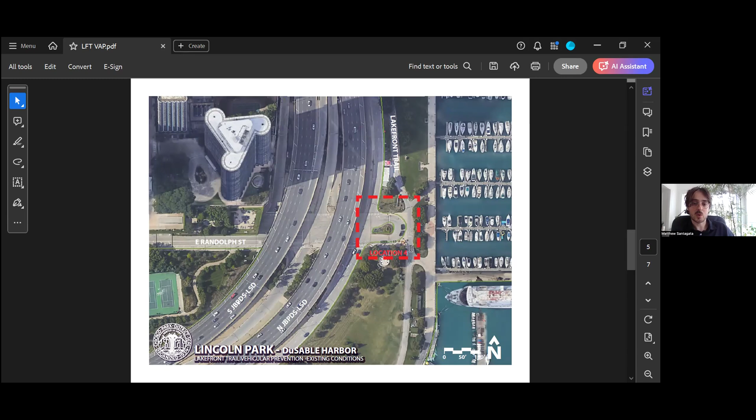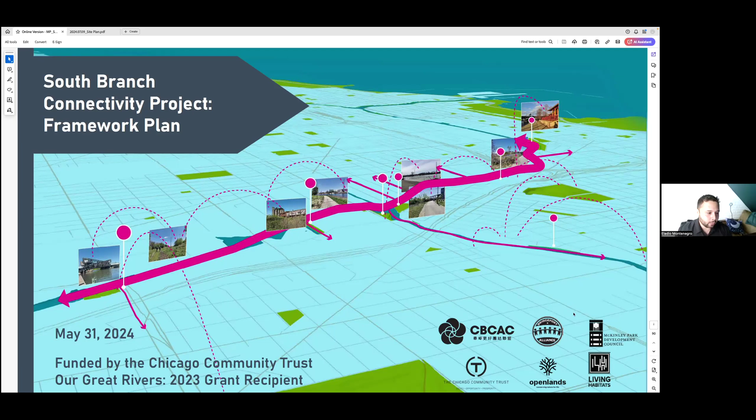So again, the goal of the framework plan is to create a framework plan connecting the lakefront from Western Avenue to Ping Tom Park. This serves as a guide for future plans or work on how to connect these separate parts of the river.

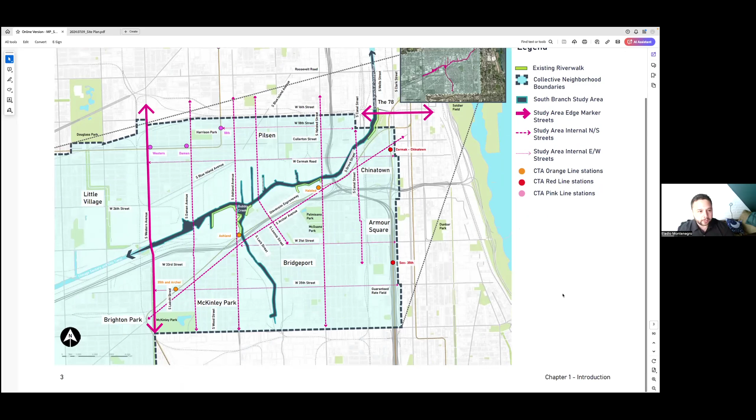There are currently a few parks scattered throughout, and in the following sections I'll talk about some of the work we did. But this all builds on two decades of previous planning done by other community groups and by the city.

Our objectives: provide a continuous trail from Western to Ping Tom Park, improve mobility, safety, and accessibility for pedestrians and cyclists, and connect the adjacent neighborhoods—Bridgeport, Chinatown, McKinley Park, Little Village, Brighton Park—all disconnected by the river, railroad tracks, and big streets. This trail will help connect all these neighborhoods.

Also, to create a cohesive sense of place along the South Branch. On the north side, downtown, the riverfront is an asset for them—it's a place to go, somewhere cool. For us on the south side, it's like factories and contaminated land. So the idea is to make it an asset for the neighborhood.

And then expand and improve active public spaces along the South Branch, encourage improvement and environmental cleanup of the properties, and provide equitable access to the riverfront for all of our neighborhoods, for all of our neighbors and residents.

So chapter 2 covers our community engagement. Over the whole year we did several community engagement events—hopefully some of you made it out or heard about them. We had 6 events over 5 months.

We talked to hundreds of people, collected hundreds of surveys, and used all that info to help put this framework plan together, so that we would make suggestions that are what people wanted, what the neighbors wanted, and not just what we thought would be our best practices.

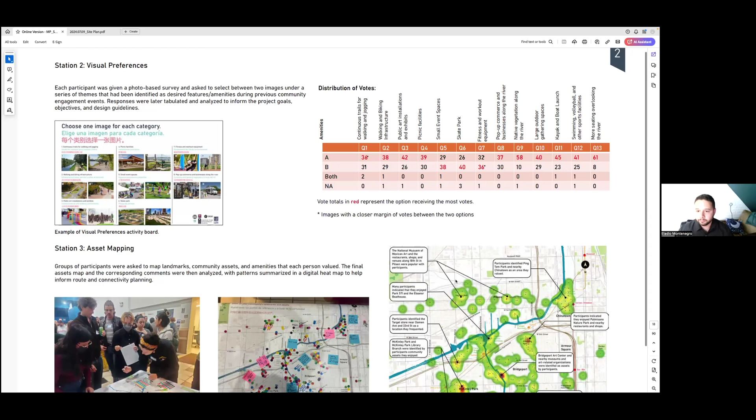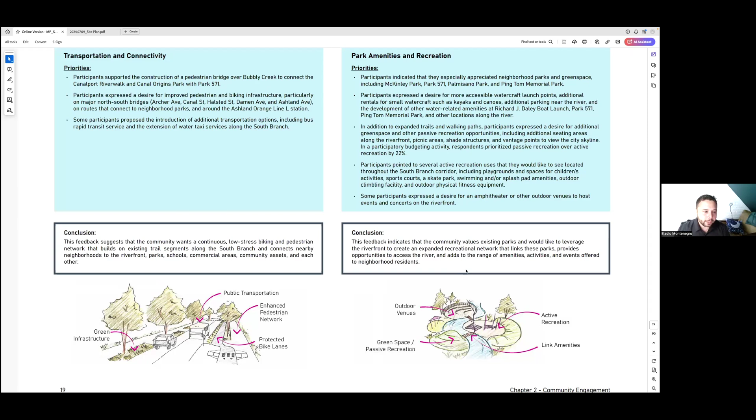They want more park amenities and places to go. We have parks scattered throughout, but the parks on the riverfront aren't very easy to get to. So making them easier to get to and giving people somewhere to go was what we heard a lot.

Folks would also like to build on the branch's history of industry and connect the adjacent neighborhoods. A huge request for art and something nice to look at was what a lot of folks wanted.

A lot of people wanted environmental and sustainable growth. They want these lands to be cleaned up and used for something positive for the neighborhood, not just more warehouses or polluters like asphalt plants or metal recycling plants, which we have a lot of in the neighborhoods now.

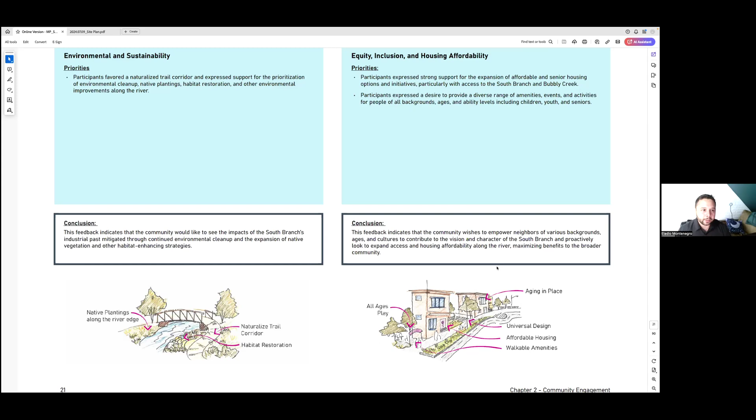And then equitable, inclusive use of the land. A lot of our seniors and older folks are very concerned that this would turn into a 606-type situation, where we make something nice for the neighborhood and then nobody can afford to live here anymore because we all get priced out. Fear of being driven out of the neighborhood was a huge piece of feedback.

And then folks want proper use of the land. They want it to be green space, they want it to be housing, and a mix of all the things, less heavy industry.

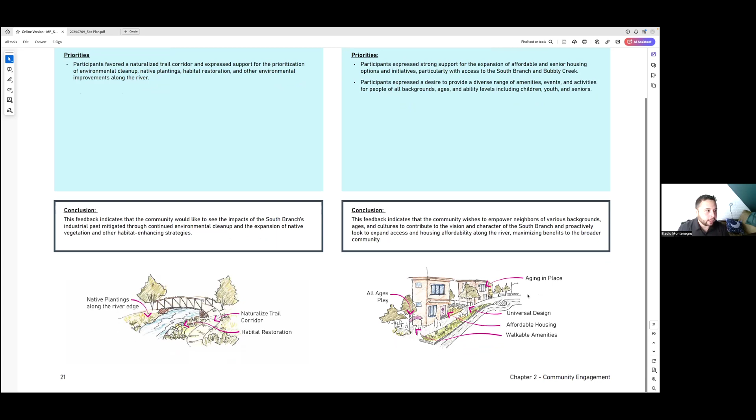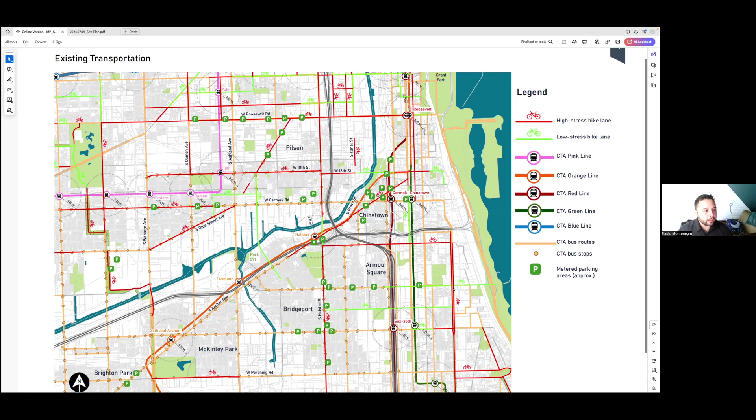Chapter 3 covers our existing conditions, so the properties that we have along the river. Over the year, we took an inventory of all the properties along this about 3-mile stretch. Who owns them? Are they planning to sell? And then what we can do to prep for when they eventually do turn over. So we broke it up into 3 sections: Western to Damen, Damen to Halsted, and then Halsted over to Ping Tom Park.

Through these sections, we have a variety of property owners. Starting at Western Avenue, we have the Daley boat launch, which again, most neighborhood folks didn't know that there's a boat launch on Western Avenue. It's kind of hidden. You have to get across 2, 4, 6, 8 lanes of traffic to get from one side of Western to the other. So only the folks who have boats know that this is somewhere where you can come and drop your boat and get to the lake.

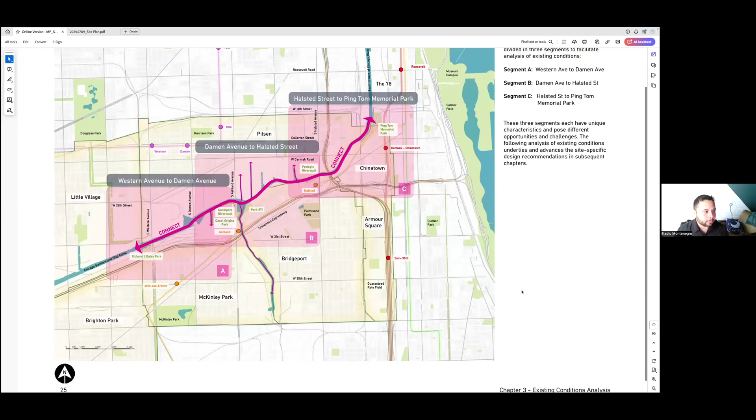So the city has proposed plans to improve the Western Avenue Bridge, and we've been advocating for them to create a crosswalk. As it stands right now, from 26th Street to 35th, there is nowhere to cross. You have almost 10 blocks where you can't get from one end to the other. So it's a huge barrier for folks to get to that boat launch.

Starting on the other side of Western, we have dark pink properties, which are properties that are slated to change ownership. The current city riverfront guidelines require that anyone who buys property on the river and develops it has to build a riverfront trail. So as these properties turn over and they build something, they'll be required to build a trail.

So we know that, if you guys follow the news, the Damen silos will be turning over soon, or they have been sold. They're going to build something, and we're going to get a trail. We would like it to be something nice, but either way, we'll get a trail.

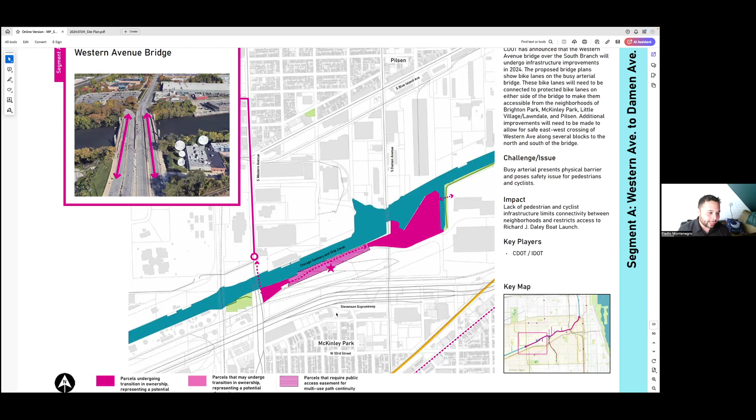But the first one is a telecommunications property called SageNet, currently for sale. We're keeping track of them, hoping that turns into a trail.

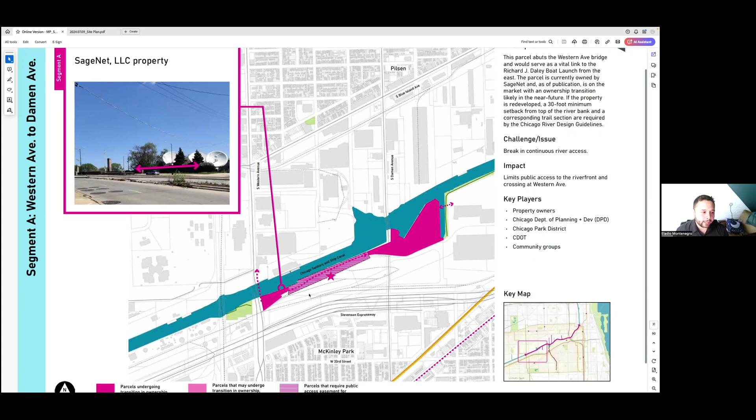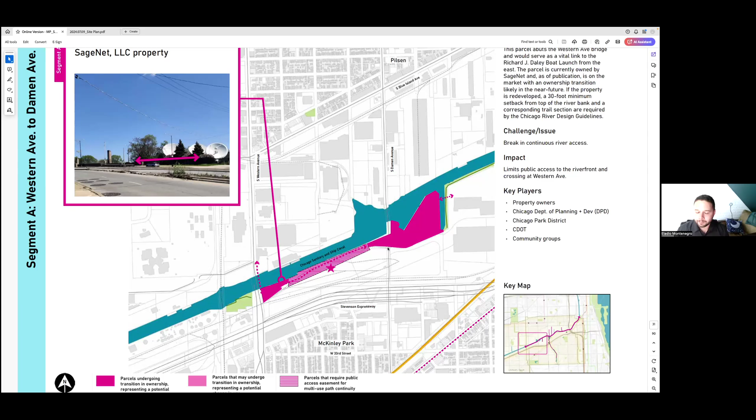And then between them is a huge chunk of land owned by BNSF Railroad. No plans to sell or do anything with it. You guys probably know working with railroads is difficult, but we've been in talks with them to see if they'll let us have an easement to connect these two ends. Slow, but they haven't said no yet, so we're hopeful.

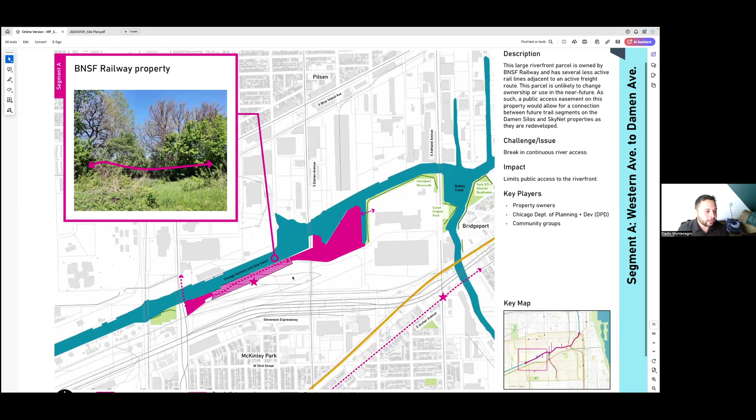They own a huge chunk of land that is just overgrown green, and our plan would be to just cut a path through it to connect these two ends that would connect to the Damen silos. Current plans are to demolish them. We would like them to be kind of like an icon in the neighborhood. But either way, if they get torn down or if they stay, we'll get a trail that would connect you to the current parks, which is Canalport Riverwalk.

And then across the street on Ashland is Canal Origins Park. So we have the potential into the next few years for there to be a connection from current parks from Ashland to Damen, and then hopefully from Damen to Western.

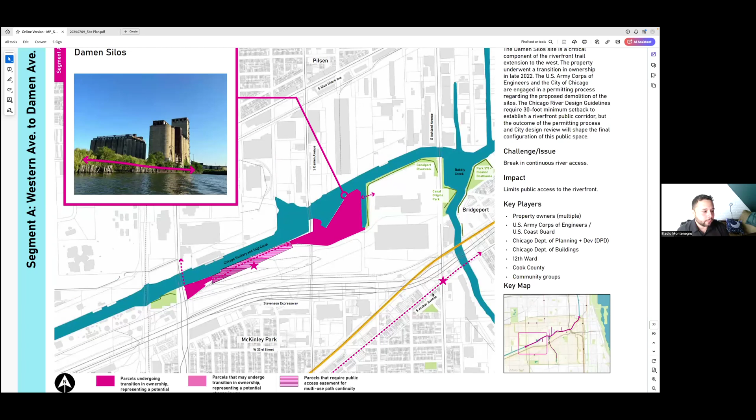And then again, Archer, very, very busy street. Our goal is to get folks off of there.

So our second section is from Damen to Halsted. On Ashland, we currently have several parks: Canal Origins Park and the Park 571 Boathouse. Future goals would be to have a bridge connecting these two parks so folks can get from one end to the other.

We have a train station on Ashland Avenue, one of the busiest on the Orange Line, but very hard to get to. There's a whole community cut off by the expressway and viaducts. A bridge over Bubbly Creek would let them go from the neighborhood to the train station and cut about 20 minutes off their walking commute, and it would help connect these parks into a continuous trail.

Once you get to the other side of the river, we have the Boathouse, which used to be a Peoples Gas lot and Superfund site, meaning extra contaminated. Next to them is a current Peoples Gas property lot we've spoken to them about. They plan to do an environmental cleanup of that property, finishing sometime in 2025. They won't tell us what they'll do with it afterward, but we're assuming if they're cleaning up their property, they're going to sell it or build something on it. At that point, whoever builds something there has to build a trail, which would connect Park 571 to Loomis, a connection to Pilsen. We hope to acquire that property and just make it one big park.

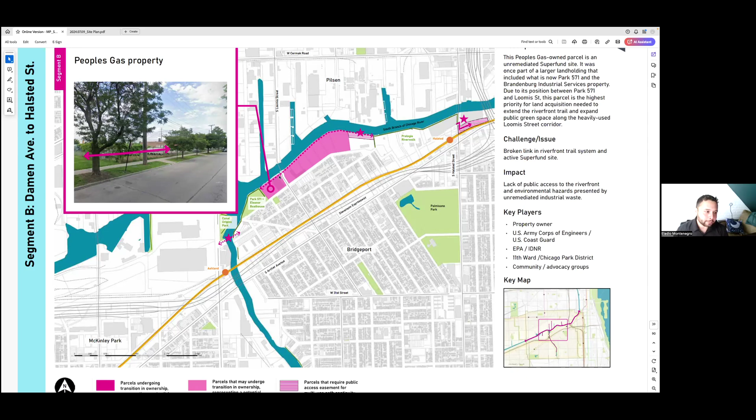On the other side of Loomis is a property called Brandenburg. We talked to them — they may undergo transition. We spoke to their property owners, and they said, yep, we're moving our stuff out to the burbs and plan to sell. So we're just keeping an eye on them to see what happens. That's also a Superfund site, meaning it's extra contaminated, so it would require a good chunk of money to remediate. But once someone builds something there, we get another trail.

Next to them is a ComEd substation. They have about 15 feet already separated from the riverfront, which we're talking to them about for a potential trail. ComEd isn't super friendly or easy to work with, but they haven't said no yet. They asked us for drawings and we provided them, so we're hoping that moves forward.

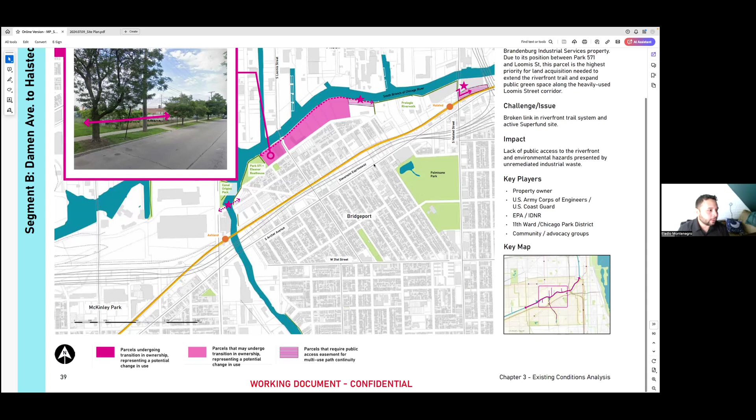Once we get to Halsted — next to the ComEd substation is the only part of the south side that has a riverfront trail built to current river guidelines. A company called Prologis bought the empty lot, built a warehouse, and had to build a trail. It's a really nice trail, which I'll show pictures of later. That drops you off onto Halsted.

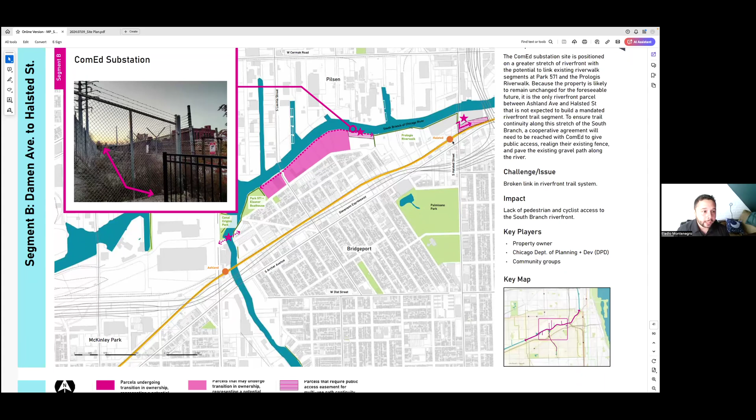The other side of Halsted, from Halsted to Ping Tom Park, is mostly businesses whose warehouses or buildings run right up to the river, meaning there's no space for a riverwalk — just the building, maybe 4 feet for a fire escape, then the river. So for this section, we have to take the street.

Right at Halsted, there's a little knee wall connecting to property owned by Canadian National Railroad. We're in talks with them about maybe an easement that would let us connect to a back street off of Archer, running along the railroad. So we're working through that one.

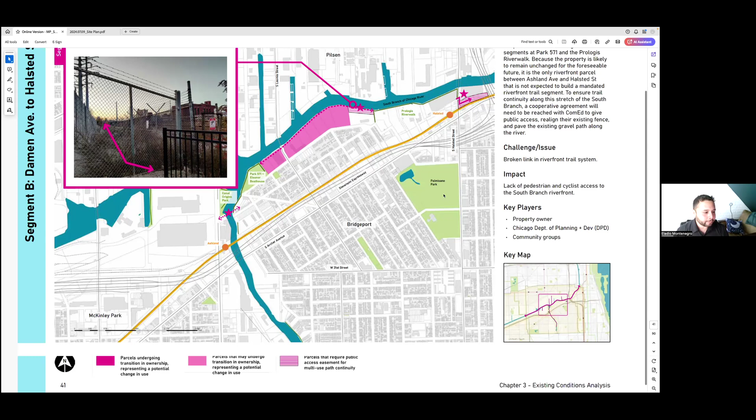After that is just a gravel road for a lot behind Archer, connecting to a building called the Pacifica. That one was recently sold, and they're going to turn it into mixed use like hotel and retail. We're working with them to put a bike lane in front of their building that would connect to the rest of our trail and continue it forward.

After that, we have a city-owned lot right on Cermak and Canal. They said they're going to put that one up for sale. Once someone buys it, we get a trail.

After that, we have Lawrence Fishery. They're not going anywhere, but they already have a dock, and we talked to them and they said whatever you guys want to do, we're happy — whatever brings more traffic to our place, they're happy to cooperate with us.

On the other side we have a yacht yard, and then finally we get to Ping Tom Park, which we think will be our most difficult piece, because at the end of Ping Tom Park there are four different railroads and an actively used bridge. That's one of our biggest challenges — low clearance, an active bridge, and a bunch of railroads running through there.

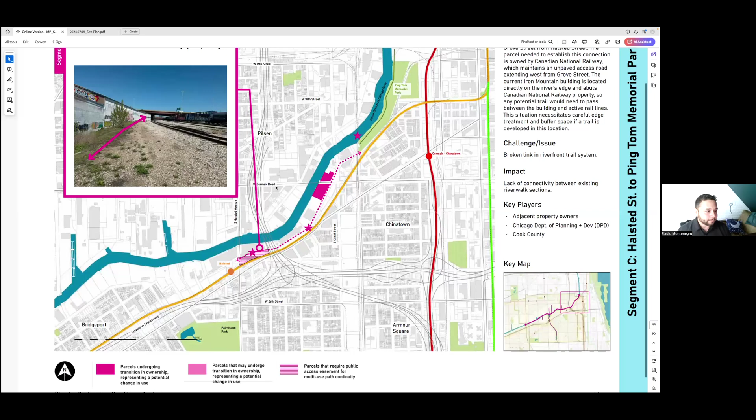So chapter 4 covers our connectivity plan, so what we would like to do is connect everything, right, from Western to Ping Tom Park.

We've listed a few alternatives. If we can't get the railroads to cooperate, or if properties don't sell, then we've outlined different routes that folks can take to go from one place to the other. And we're actively working with our wards to see if we can turn those alternative streets into greenways where folks can bike ride to get from one side to the other.

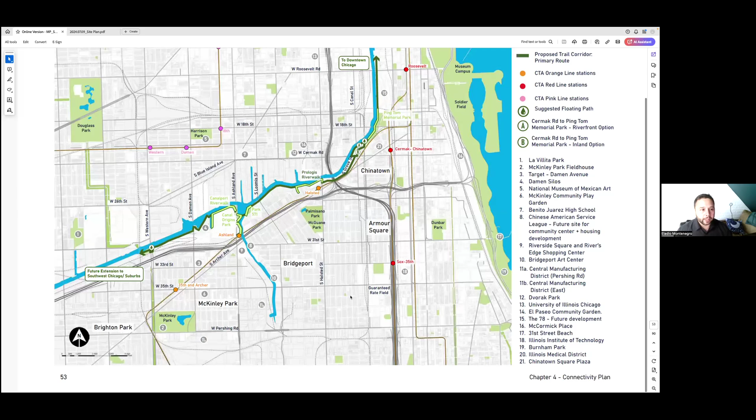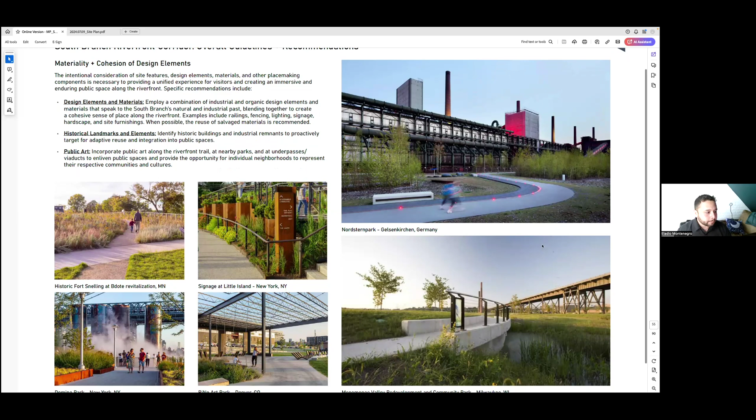But all of our suggestions center around using what we already have. We know that the railroad isn't going anywhere. We know that the I-55 isn't going anywhere. So our suggestions center around using what's there, right? Doing simple, easy to do construction that incorporates the history of the neighborhood, which is an industrial corridor.

One of our big recommendations is making sure our trail entrances are well lit, that signage is up. Wayfinding is a big issue for us on the South Branch. There are several parks, but they're not easy for you to see. You drive down Ashland and see that there's 2 parks on either side on the river. There's no signage for them, so wayfinding is important, and making sure that our entrances are well lit and welcoming.

And a big piece is getting people close to and onto the water. We already have a lot of that in the city, so it's something that we want to do on our end. And then continuing to plant local natural foliage, local trees, and creating habitat for our fish and wildlife.

And then creating public spaces, give people something to go to and something to see, and incorporating, again, our train stations, our viaducts, our bridges, to create inviting, nice places to go to.

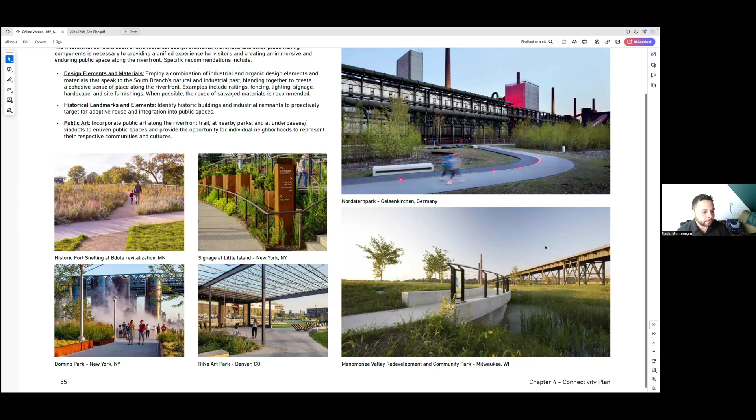And then we cover our recommendations on how we would connect these things, right? So, the boat launch, you got to get across Western. A lot of our recommendations for these big streets are to go under the bridges, like we do downtown, creating bridges under bridges. And so all that requires working with CDOT, with IDOT, Army Corps of Engineers. We've had conversations with all of them, and we're working to move these plans forward.

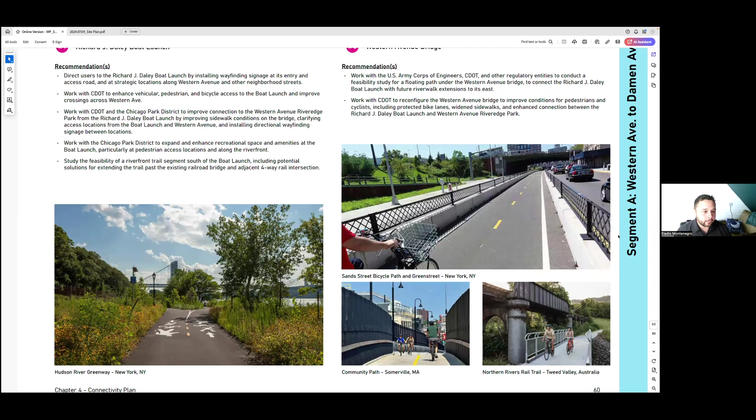And so at our Damen Silo site, we'd like to see a bridge over one of the slips, natural green access for folks to just sit and be by the river. The Damen Silos, Park 571, everything around Ashland has a great view of the downtown area. So our goals are to create a view that could look that way.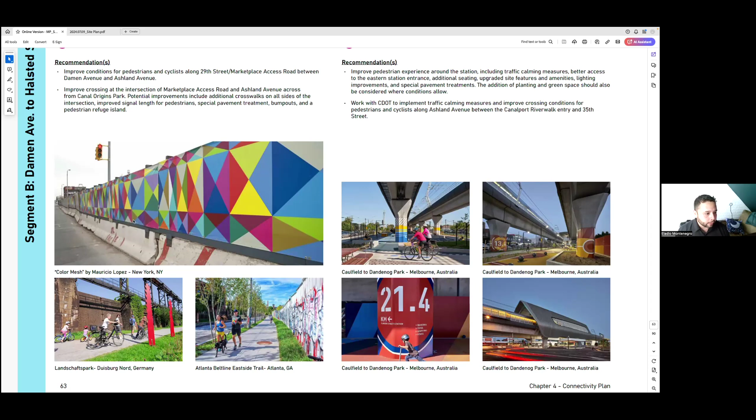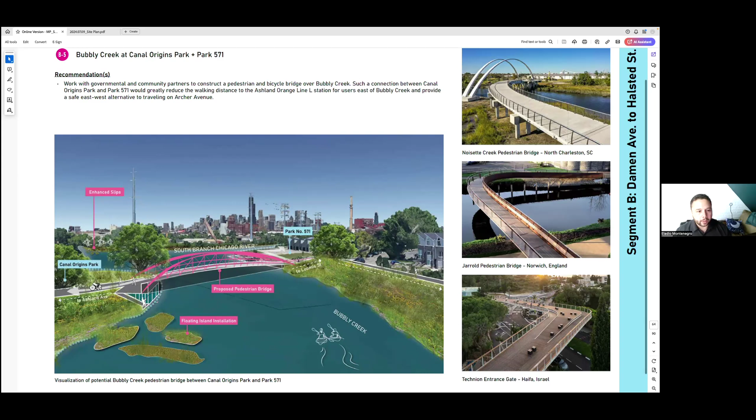And then one of the big things that we would like to see, and that we know folks in the neighborhood like to see, is the bridge connecting Park 571 to Canal Origins across Bubbly Creek. And we already have ideas where those bridges could go and land, and there's examples from here in the States and overseas where it's done. So it's not a huge lift, but it just requires working with the park district, with the city, and with whoever's going to give us a ton of cash to make it happen.

And then again, more recommendations on what we could do to, once we connect properties, right, creating trails, examples from here in the States and abroad of what could happen.

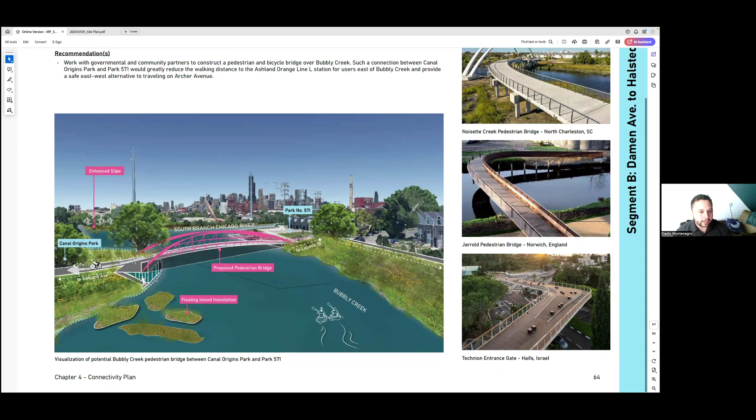And then examples of, at the ComEd substation, they have their heavy duty walls, which of course they need to protect the substation, right? That's serious infrastructure. But we have examples of what it could look like, right? You have to have a heavy duty 20-foot wall. You can add art. There are examples of places where it's been done, where it's something that could look nice.

And then, examples where we have local food stands and just places for people to go, and for businesses to open up.

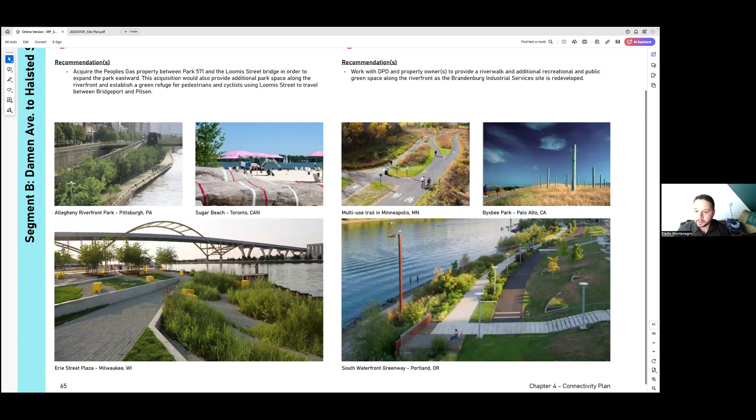We also have our piece with the Canadian National Railroad, which would put folks right up against the railroad. There's about 30 feet between the wall and the railroad at Halsted, and that's obviously a concern. But again, there are examples where it's been done right, where you create the right protection and people can use these sections to connect from one side to the other.

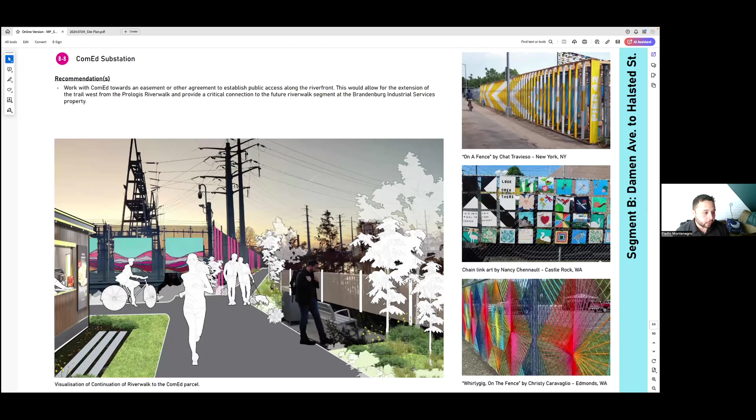And again, more art, right? These viaducts can be places that look nice and inviting. Same thing with our viaducts and underpasses. And then very at the end, we said Ping Tom Park is a huge challenge to get outside of. We have examples already in the city of how you can get under bridges. So again, we're not asking for anything crazy, but things that are already being done in the city, downtown and on the north side. And then more recommendations on how to access Ping Tom Park.

And then our document also lists other areas of opportunity, other things that are happening that can help move our plans forward. And down at the end, we have a list of opportunity areas where things can be moved forward and recommendations for all that. But again, it's a 90-page document. If you guys want to go through it and see all the nitty-gritty detail, there's a lot of data in there, there's a lot of pictures, but that's the general gist of it: connecting one end to the other.

We've identified all the different players, and we're actively working with a lot of them to move this stuff forward. There's a Pilsen organization called Perro, which is in the final stages of getting a grant from Green Latinos, and their goal is to make improvements to Canal Origins Park, which is right here on Ashland. Hoping that goes through and they get money to make actual improvements, and they're going to use our framework plan to help guide that stuff. And again, we're working with the 11th and 12th Ward and 25th Ward to move some of these changes forward.

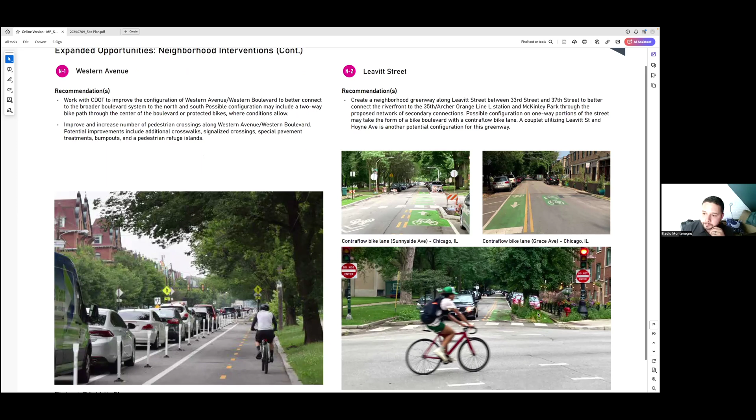Yeah, and the document has a bunch of examples of what stuff under viaducts can look like, other places that have done it, that have made these ugly pieces of infrastructure look interesting and inviting.

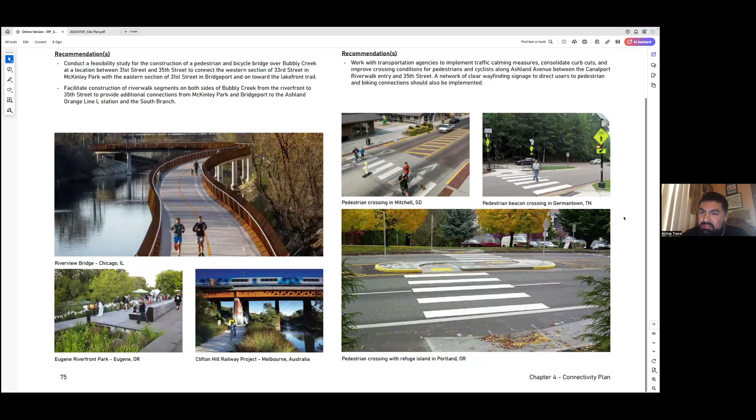Comment from Laura: I don't get down to this area much, but this is certainly an incentive to do so. And that is 100% right, it's build it and people will come. Yeah, I mean, even if you go to a part that's already built out, like Ping Tom Park, a beautiful park right next to Chinatown, you can go get your boba tea, walk over to the park and see what we would like the rest of it to look like.

Oh, I forgot to mention, we did recently get awarded a grant from the National Park Service. They're working with us on designing wayfinding for the whole stretch and on finding other grants and funding to actually move some of these things forward, and figure out how to acquire some of this land or get easements and actually build some of these things.

That is awesome to hear. And we are planning some bike and boat tours of our stretch of the river to showcase what's there and what could be there. We haven't finalized that yet, but we'll make sure to email you all once that stuff is figured out so you can come join us. Yeah, we're happy to share the date once you guys have a date set for that.